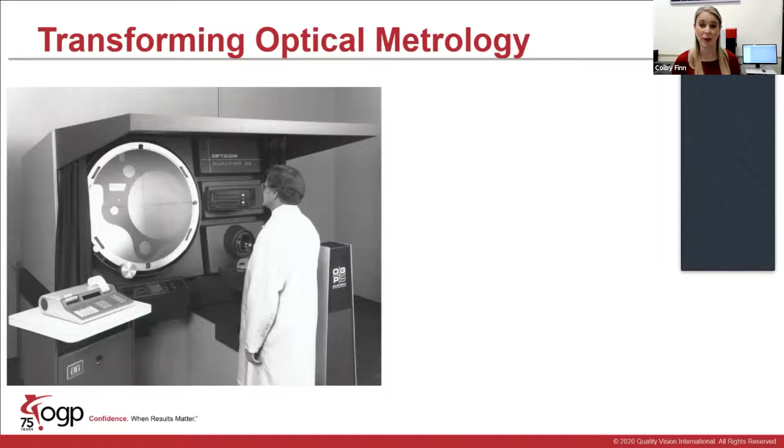So like I mentioned, we have been in the business of optical metrology for a little over 75 years. And we've been part of a major transformation in this industry. When we first started, all measurements were taken with the human eye, like you can see on the screen, with an optical comparator. But ever since we introduced the first grayscale subpixel image processing for a video system in 1980, software became a key component of video measurement.

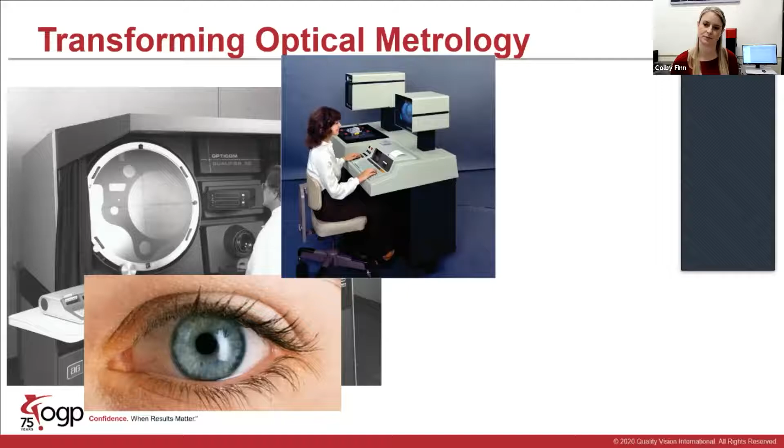And now today, it's hard to find any modern piece of measurement equipment that doesn't require software to take a measurement. So why did this transformation occur? The obvious answer is software is more efficient than humans. You gotta pay people, they get tired, they complain, they make mistakes.

But people are actually really good at some things related to optical measurement, such as automatically recognizing parts, detecting dirt, whether it's from your part or not from your part. And it's taken many, many years to get image processing software to the level where it can mimic human ability in video measurement, but also not require a lot of training. So today we're going to talk about how software technology continues to push optical metrology forward, both related to capability and ease of use.

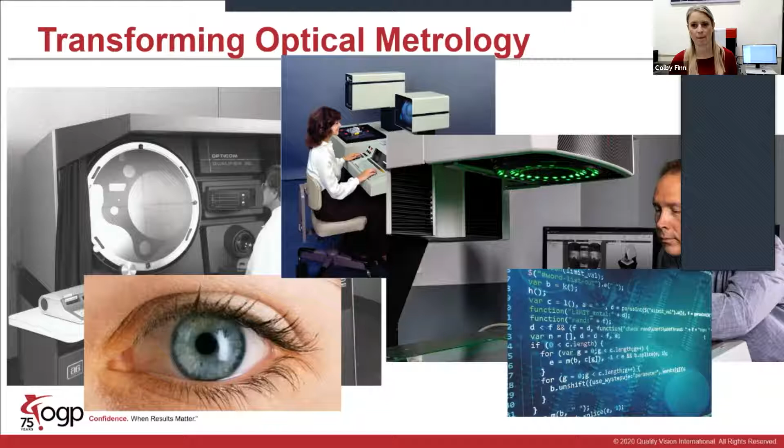So we organized our software tips based on the reasons people choose non-contact measurement technologies, say over traditional technologies like tactile CMM. And there's 3 reasons. The first is they're faster. You can get many measurement points and many dimensions in one shot with optical technologies.

Second, they're better, meaning for some applications, you get more accuracy and higher resolution. This is specifically true for small parts with small features or delicate parts that you don't really want to touch.

And lastly, they're easy to use. So when you're programming a measurement system, teaching it what you want to measure, when it's an optical system, you see a live image of your part. So it makes it very easy to interact and get immediate feedback on what you're measuring.

So today we're going to talk about software tips for video measurement and 3D scanning separately. So both technologies have the same goal to measure dimensions on your part, but there's different strategies and best practices for each. Video measurement, you're usually measuring feature by feature or getting coordinates, where with 3D scanning, you're measuring and grabbing data on your entire part at once.

So Jim is going to show you software tips for video measurement using OGP's Zone 3 metrology software package. Zone 3 is the software that acquires and analyzes data from OGP's 3D multi-sensor systems. And I'm going to show you 3D scanning tips using Kotem's Evolve suite. So Kotem is a sister company of OGP. We're both divisions of QVI.

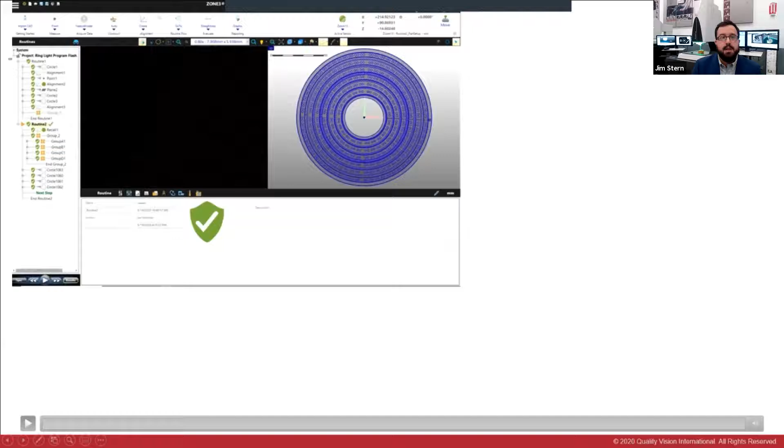So now we're going to show a little video example between what you might have and what you can do with a larger field of view system. So what you're going to see here in the video is a traditional zoom system with a smaller field of view. So we're going to be measuring a multitude of diameters on this part, all right?

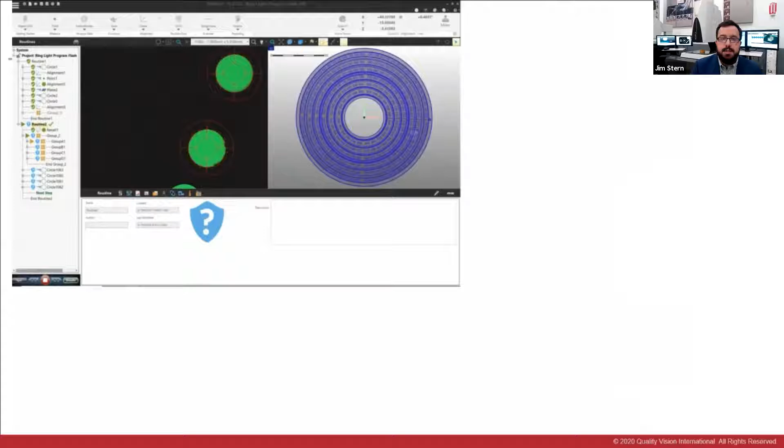So this traditional system has a smaller field of view to start, but also has an optical zoom system to be able to increase accuracy and your optical magnification on the features that you want to measure. So maybe this is not the system or the field of view that you might want to use when you're doing repetitive dimensional checks like these diameters going around this part, because it takes over 5 minutes.

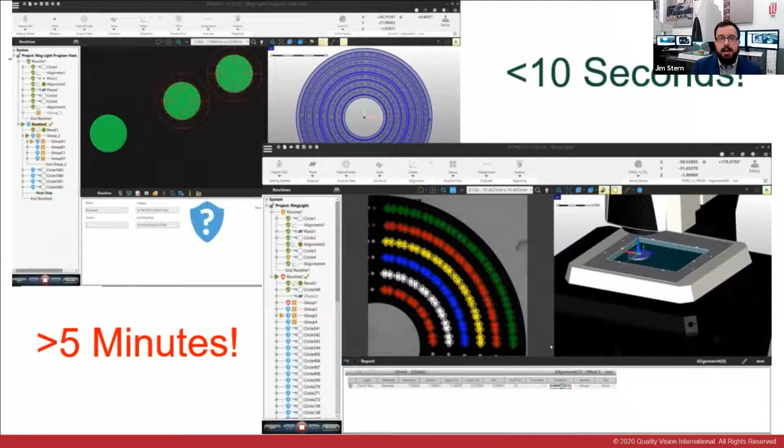Now, let's do the same part on the Fusion system here, where you're going to see a large field of view and be able to see all the measurements at once. Now, while using software, we're able to measure all these diameters in a single field of view all at once, now reducing our inspection time to 10 seconds, all right? Another benefit of large field of view is that it allows you to recognize and align parts automatically. This is possible in Zone 3 at any field of view and on other systems like the traditional one we showed.

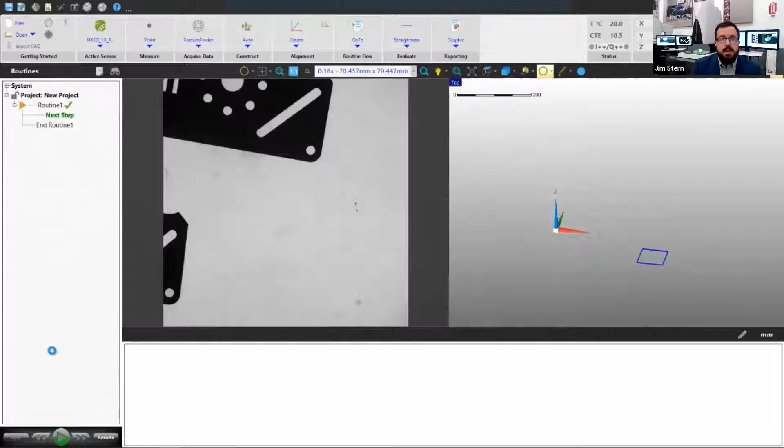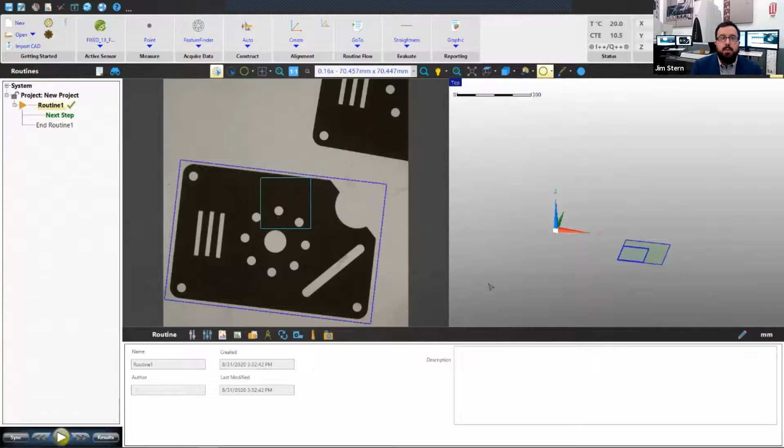But it is more efficient when you have a large field of view to see the entire part that fits inside that. So right here, we have parts set down on the stage, no specific orientation or fixturing, and then we're going to search in a specific area to be able to automatically recognize the part and then inspect all the dimensions that we need to in seconds, showing you a visual representation of what part passed and what part failed, so an operator can easily grab off the stage which ones they might need to reject or which ones they're going to keep.

All right. Now, with having large field of view systems, one thing you got to be aware of is some of the caveats that can go with that. If you're going to take advantage of these entire field of view systems that they have to offer, you need a very high quality lens design combined with advanced software compensations to get the accurate measurements that you're looking for.

We're not going to go deep into the optical lens design theory, but there are two things that are extremely important for video measurement, especially with large field of view systems. Getting the same results anywhere in the field of view, which equates to your distortion across that field of view, and getting the same results even when you aren't at the perfect focus of the system, which represents your telecentricity.

Now, this is a gross example, but the tricky thing is an image can look perfectly fine to the human eye, but have huge errors across the field of view and the depth of focus or the range the image looks in focus. We aren't talking microns, but hundreds of microns. Published accuracy specifications don't typically apply across the whole zoom range. So you can't just assume your field of view is good by what you see on a technical data sheet.

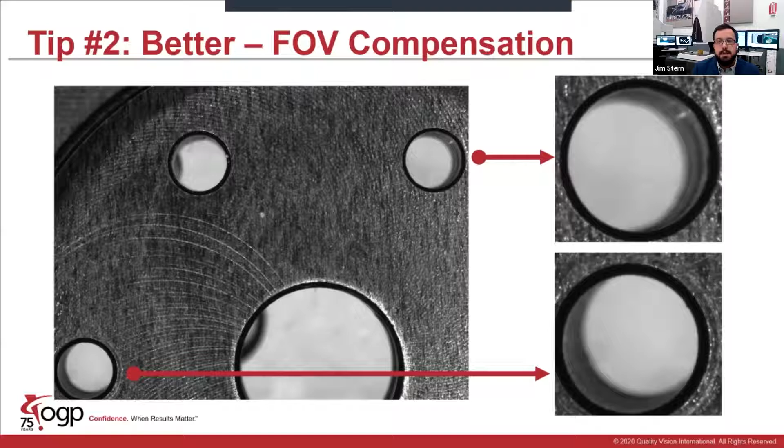At OGP, we've learned you need to have lenses designed specifically for your video measurement and software that understands the characteristics of your exact lens to get an accurate optical performance. Our large field of view systems go through rigorous alignments, compensations, and testing in the factory to ensure they will meet your customer and your specific subpixel accuracy expectations. And what you get is the images that you see on screen now, all right?

Our recommendation is to go with an experienced video measurement system vendor you can trust or get educated on tests you need to perform to confirm your video system is optically accurate. I would also recommend a real-world test of your application on the system you're probably thinking of choosing to measure your parts or your applications in the real-world environment.

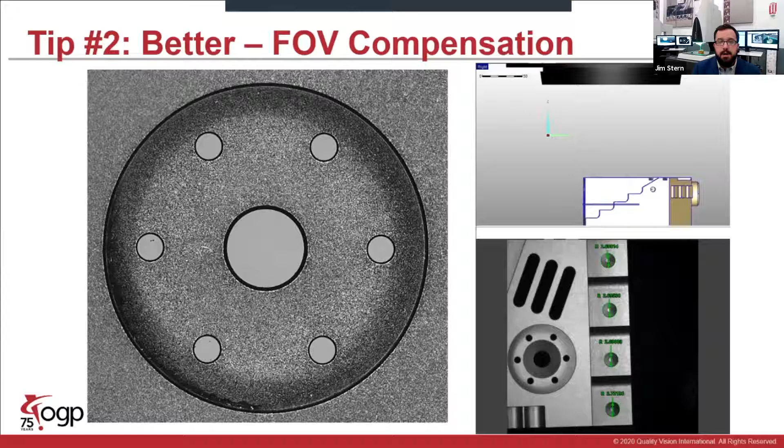Now, with this, you also get to use your full field of view when you're compensating for the distortion correctly with the software or any errors that might be involved. Because you have a large field of view, you want to be able to use the whole optics or what you see on screen. So as you move around the stage, you want the same results inside the accuracy specification for that field of view.

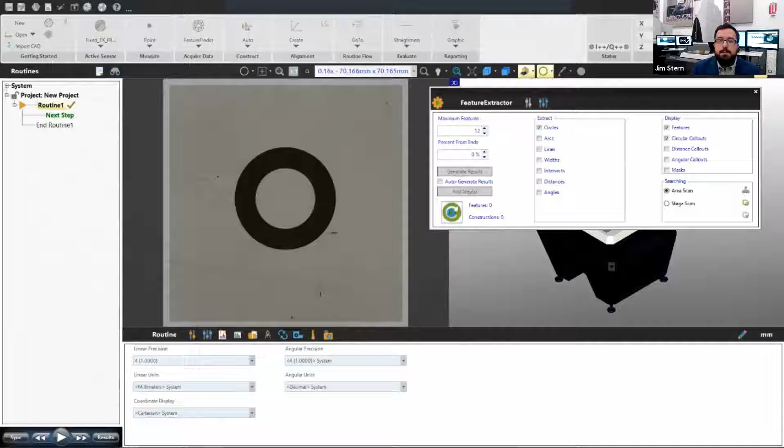So now let's get into maybe some easy video measurements, all right? So one thing you can utilize to make video measurements easier is CAD models, all right? Everybody has CAD models these days, but CAD models really simplify measuring with video. There is a misconception that programming from 3D CAD with video is difficult.

Since your CAD model is 3D, hold on, let me turn the light back on. Gotta save energy. Since your CAD model is 3D and you're only seeing a 2D video image on screen. But this is definitely not the case, and I will show you a couple examples of this.

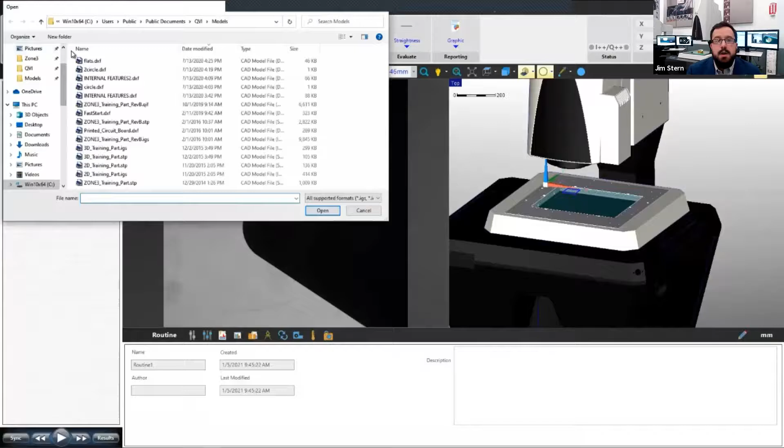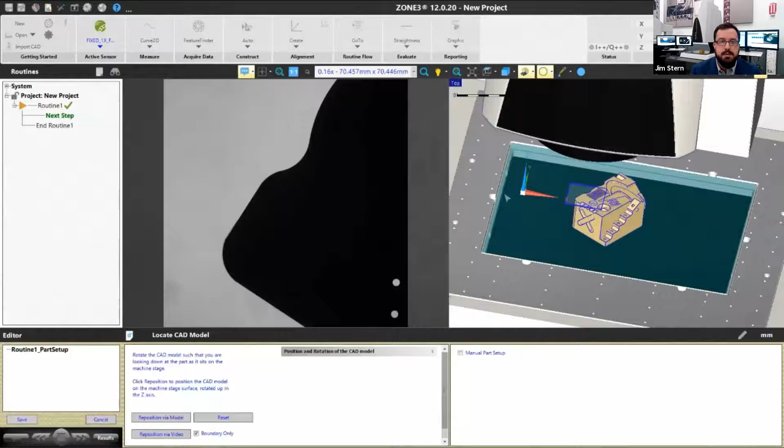All right. So what you're seeing here is a 3D CAD model loaded into our Zone 3 software. It comes in CAD coordinates, but it's not really where it is sitting on the stage. So what we can use is the large field of view to automatically figure out where the part is on the stage using our reposition via video option in Zone 3. Now, once it figures it out, it places it on the stage in the real world where it is, all right?

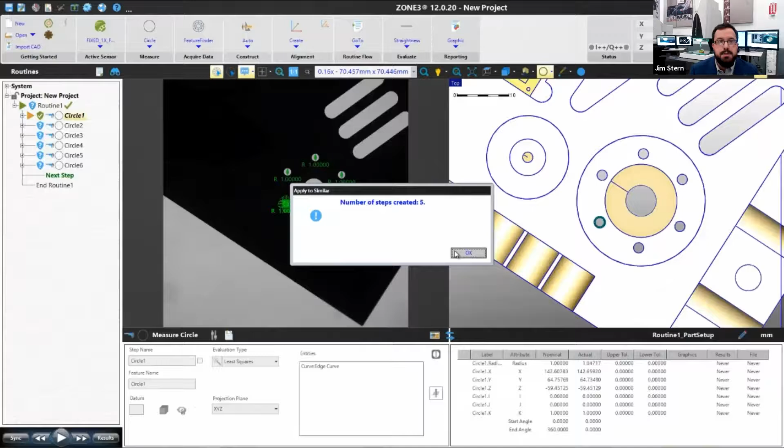So now I can quickly start measuring features on that CAD model using automatic path generation using our edge detection feature finder. Once that's done, I can then use the CAD model to automatically search for similar features and automatically program the extra 5 circles that you see.

We can optimize that to then utilize the field of view to automatically measure that in one single spot on the field of view, trusting that we get the same results because we're compensating for any kind of errors across that whole field of view.

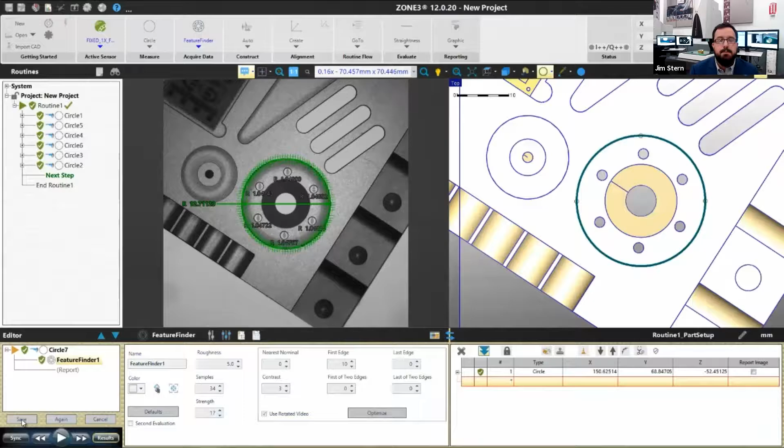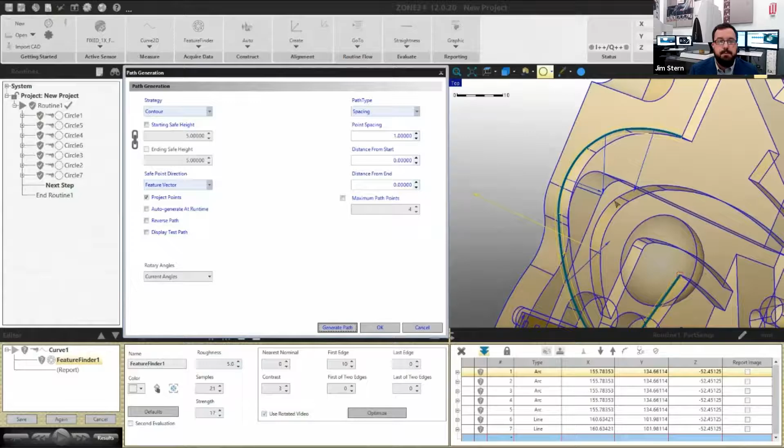Another misconception is being able to measure features that might not be able to be measured using backlight, as well as complex curves or geometries that you'll see here. I'll select multiple curves into one finder, and then use the system to automatically generate a path to measure these features with our feature finder tool all at once. And then we'll go automatically to where it is and measure this automatically with our feature finder tool, breaking up into lines and arcs based on that complex curve.

All right. Those were some tips on how to get faster, better and easier measurements with video sensors demonstrated by the OGP Zone 3 software. But now I'm going to send it back over to Colby to give some tips for 3D scanning using Evolve Smart Profile. All right, there you go, Colby.

Thank you. Great. Thanks, Jim. So like Jim said, I'm going to show faster, better, and easier tips for 3D scanning. Before I get started, I'm going to show you the machine I'm going to use for my demos. So let me stop the share for a second. Get started.

So this is an OGP ShapeGrabber AI 320. ShapeGrabber systems are automated laser scanners for fast 3D measurement. The system can take more than 1 million points a second. So the laser line scan head moves up and down behind this cover here, and your part automatically rotates on the rotary here for full 360 degree coverage.

So this system here can have up to a 190 by 300 millimeter cylindrical measuring range. And this is our most compact automated unit, but we do have larger systems that can scan parts longer than a meter. So this system also has a tilt axis that actually tilts the scan head. It's motorized, it's automatic. And that way you can scan the top of your part without having to pick it up, flip it over, rescan it, and use software to stitch it together.

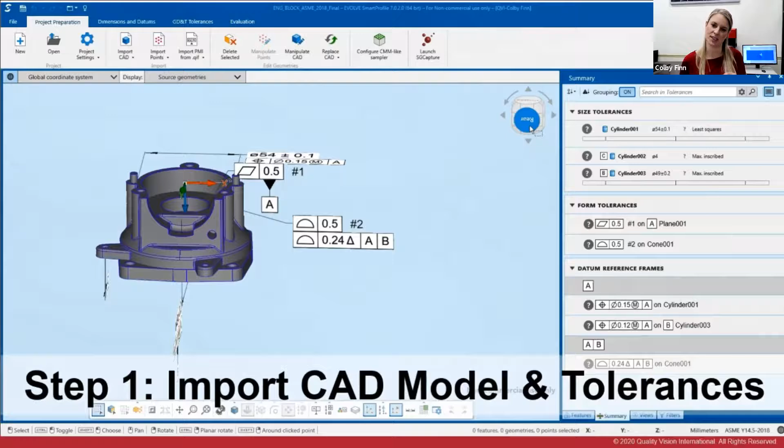So I'm going to show you a new software technology that allows you to overcome these issues and do fast GD&T with 3D scanner data. So we're going to use Evolve Smart Profile and a CAD model to do very quick GD&T. Sorry. So the first step here is to import your CAD model and tolerances. And if your design engineer didn't embed the tolerances in the model, you can readily add them in Smart Profile.

Once you have everything in there, you're going to import your measured points. I'm going to use points from my ShapeGrabber system here, but Smart Profile can take points from any device, whether it's a CMM, laser scanner, CT scanner. So you'll see my points in a second. It's the green scan cloud.

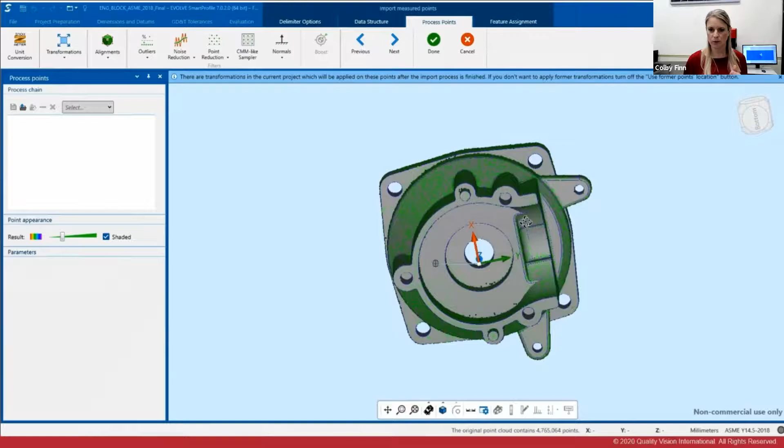And I took 4 or 5 million points with my scan, and the part scanned pretty well. You don't see a lot of gross outliers, but it's still not ready for GD&T. There's still a little bit of noise running on the data. So we have to prepare our point cloud for GD&T. And what Smart Profile has is an algorithm that was designed to take 3D scanner data and make it ready for GD&T. It's called the CMM-like sampler. I'm going to run that now.

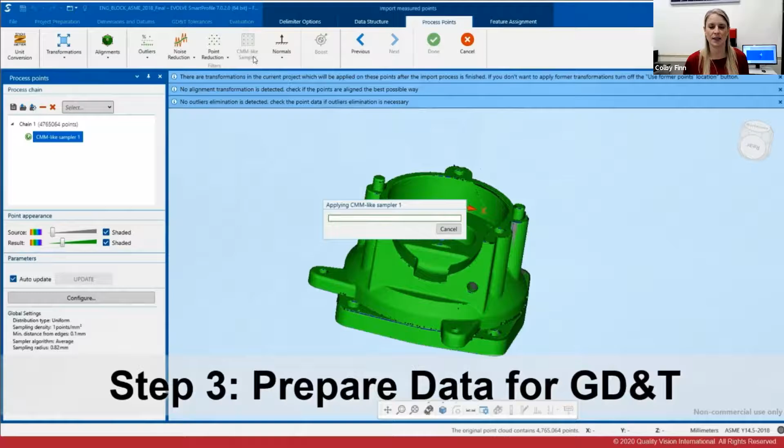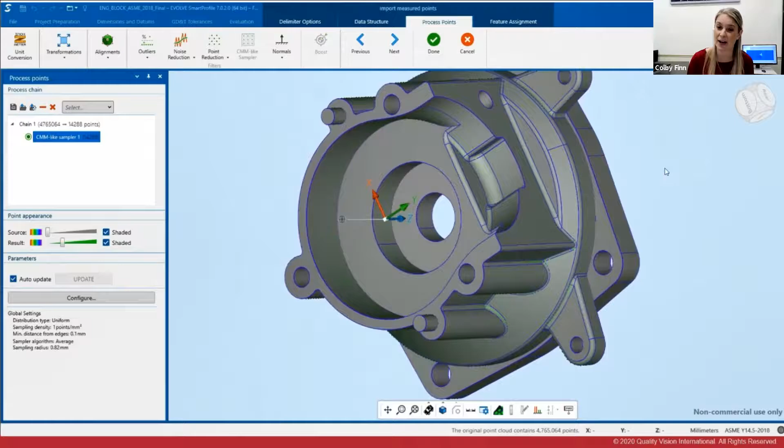So we call it the CMM-like sampler because the resultant point cloud we're going to get is going to look like a high density point cloud taken with a CMM. And similar to CMM data, all the points are going to be valid in X, Y, and Z, and therefore you're ready to do GD&T. So I don't know if you can see it through the video, the tiny little green points on the model are my points after the CMM-like sampler. So now we're ready for our fourth and final step, and that's to evaluate the GD&T results.

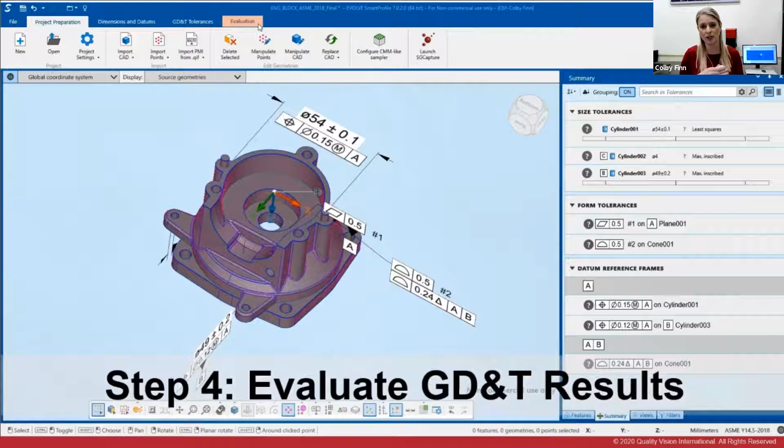So the software is going to fit the point cloud to the CAD model, run a bunch of optimizations to simulate hard gauging and give you GD&T results. So you will see here that everything passes.

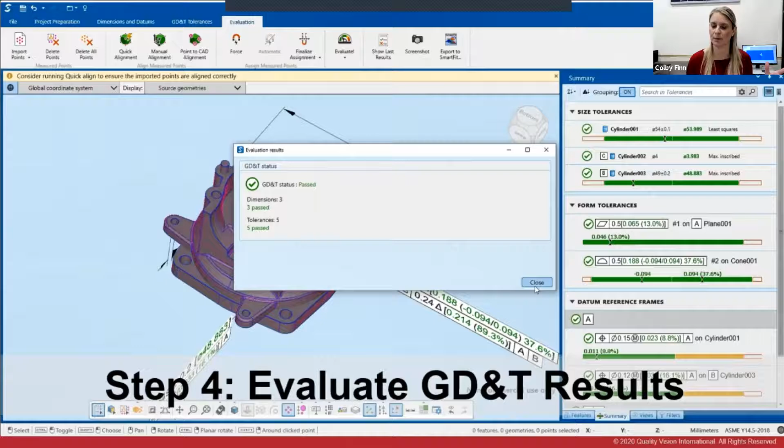And what I was showing you was a step-by-step of how to process 3D GD&T with Smart Profile. But all of the steps from data acquisition to reporting can be fully automated. So you don't need someone here clicking the buttons. You can get a fully automated workflow. So this demo was how to get fast GD&T with a 3D scanner.

And now we're going to move on to how to get better data from a 3D scanner, so more accurate results from 3D scanning. So I'm going to show you a software technique that allows you to get better measurement results without investing more money in hardware. So we're going to show a new software compensation method called Boost.

And what Boost does is lets you take the accuracy of a reference machine and map it onto the data from either a cheaper or less expensive or a faster technology that's not quite as accurate as the reference device. So I'm going to show you an example of Boost for 3D scanning.

And Boost is part and machine specific, which means you have to create this compensation for every part and machine combination you want to give this accuracy boost to. But luckily, the software does most of the work for you, and I will show you the 5 easy steps to both create the compensation and measure your parts in production.

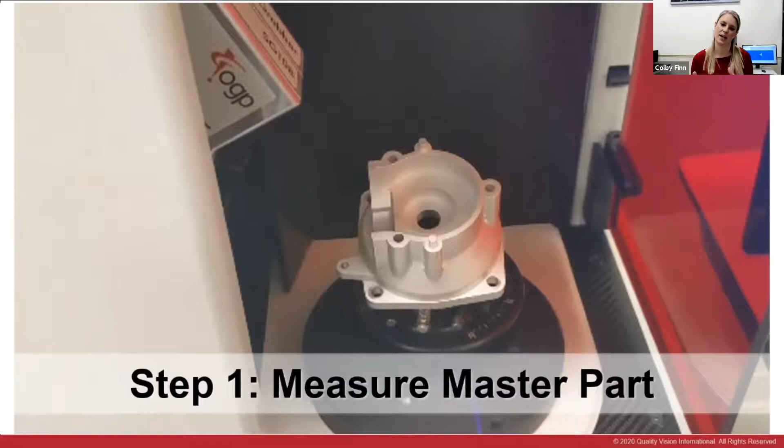So the first thing we're going to do here is select a master part from our production run and measure it on both our high accuracy device, in this case, a CMM, and our fast production technology, in this case, our 3D scanner.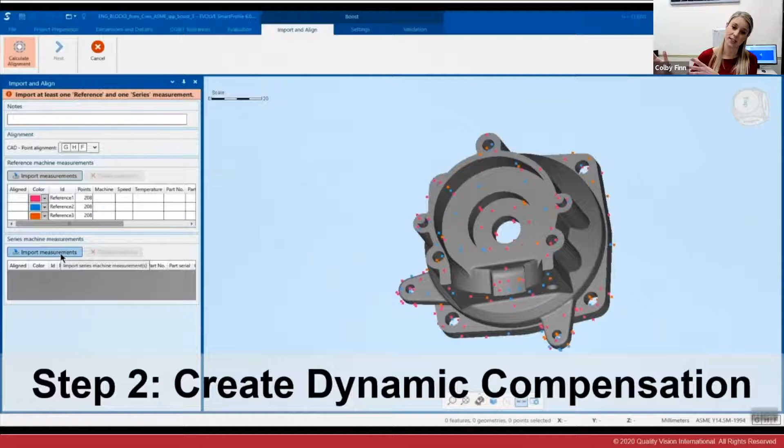Once we have the point clouds from both devices, we're going to load them into Smart Profile, and it's going to automatically create that dynamic compensation. Again, this is going to map the accuracy of the reference device onto the data of your high-speed device.

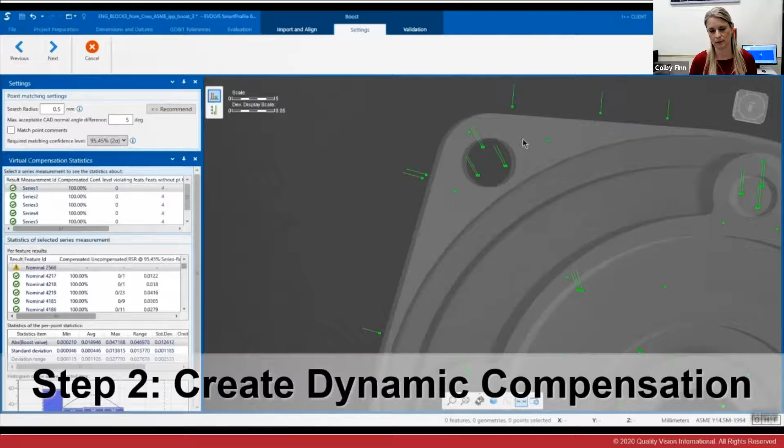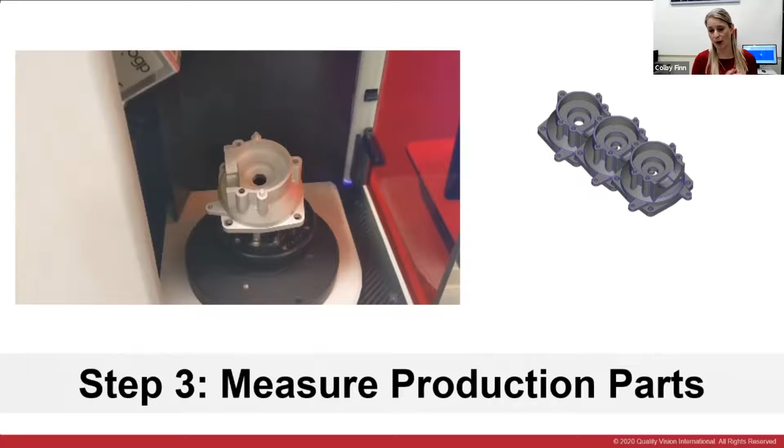So you'll see on the screen, the little whiskers represent the point-based compensation the software is doing. So once you have this map created, you're done with your reference CMM, and you're ready to measure production parts. So step 3 here, we're actually measuring our parts with our very fast technology.

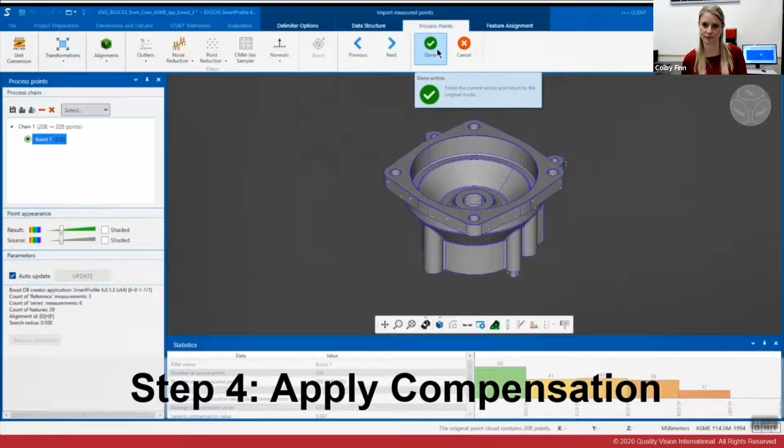And now step 4 is to apply that boost compensation. So in Smart Profile, we're going to click the boost button, and it's going to make those production points more accurate. So now that we've done that, the last and final step is to evaluate the GD&T of the compensated points that are more accurate.

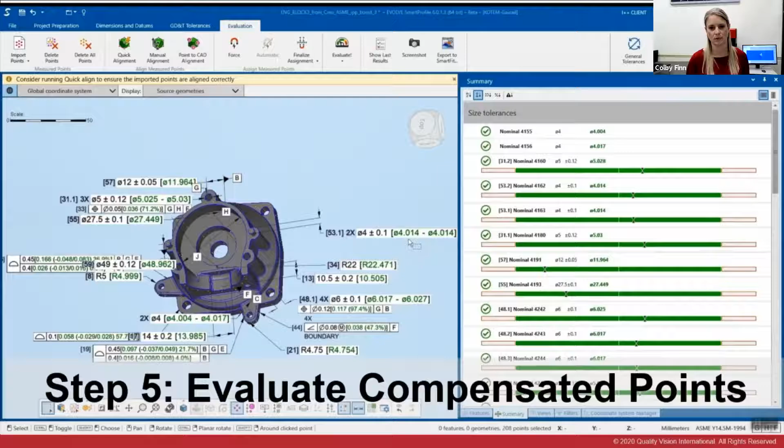And now everything passes. So similar to our last demo, all of these steps can be automated, and I'm going to show you a quick video of what that looks like and what our typical production workflow is like. So here is your typical automated workflow. The operator pushes scan and the machine starts acquiring data.

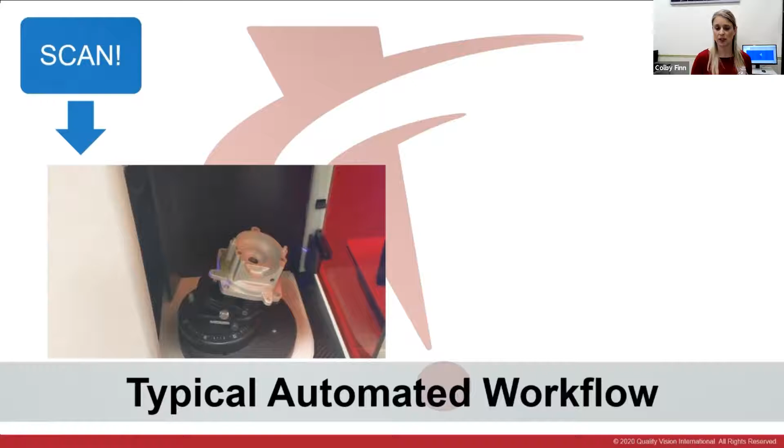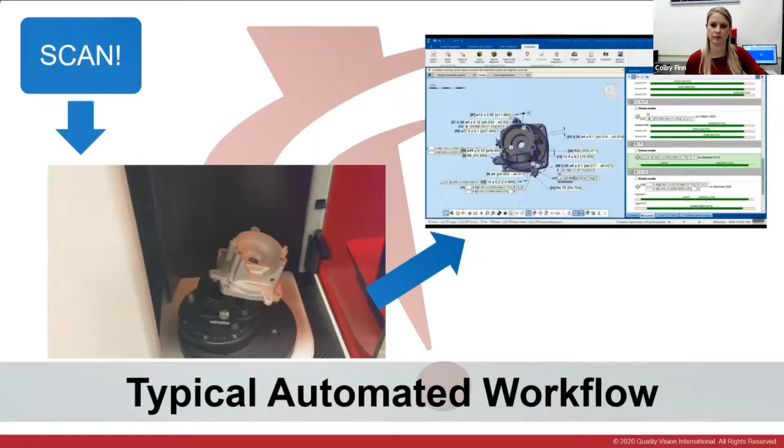As soon as it's done, the points are going to automatically go into Smart Profile, and Smart Profile is going to automatically start evaluating them and produce a report. So this was a way to get better data using software for 3D scanning. Again, so you can use software, so you don't have to invest as much money in hardware.

So our final tip for 3D scanning is about making measurement easier. We're going to show you how to do easy 3D GD&T failure correction. So GD&T can save a company a lot of money.

But that's only if the entire manufacturing operation is applying it correctly, meaning the design engineers entered the correct tolerances, the quality engineers evaluated them appropriately, and the manufacturing engineers know how to adjust their processes to get parts to pass. And we're going to focus on that last aspect, the connection between quality and manufacturing.

So say your GD&T fails. What do you do to get future parts to pass? Machinists are used to working in their machining coordinate systems with their fixtures and their control points. They don't want to adjust their process based on our profile tolerances and our GD&T datum structures.

So I'm going to show you an easy software tool that takes GD&T results and translates them into machining corrections to get future parts to pass. So this is a new simulation and optimization tool that's part of Evolve in the product Evolve Manufacturing.

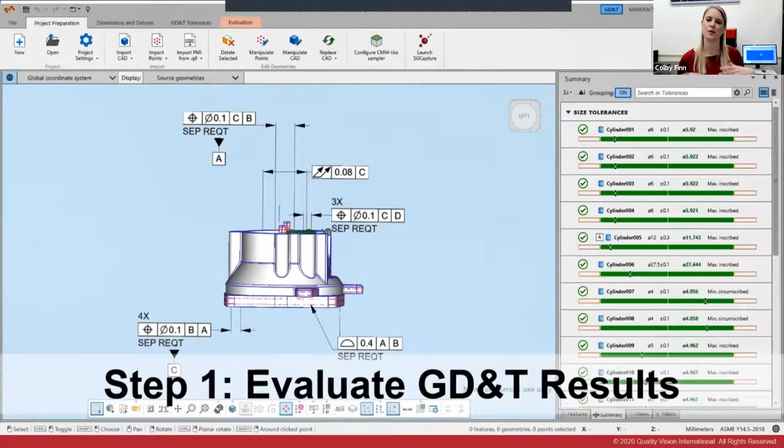So we're actually going to start out where we left off with the other two demos, where step 1 is to evaluate our measurement points for GD&T.

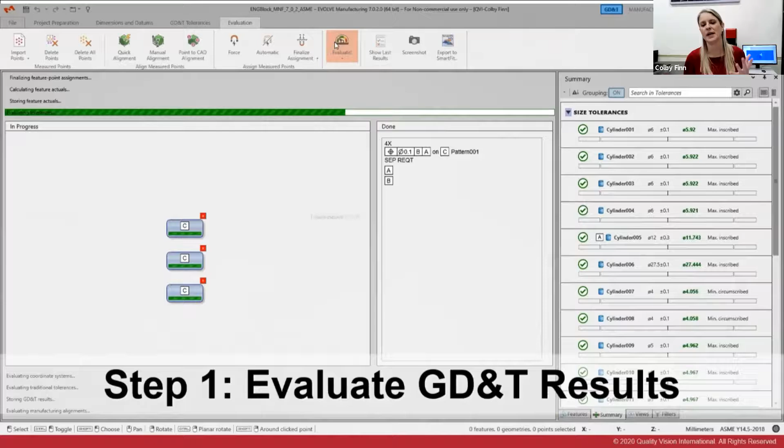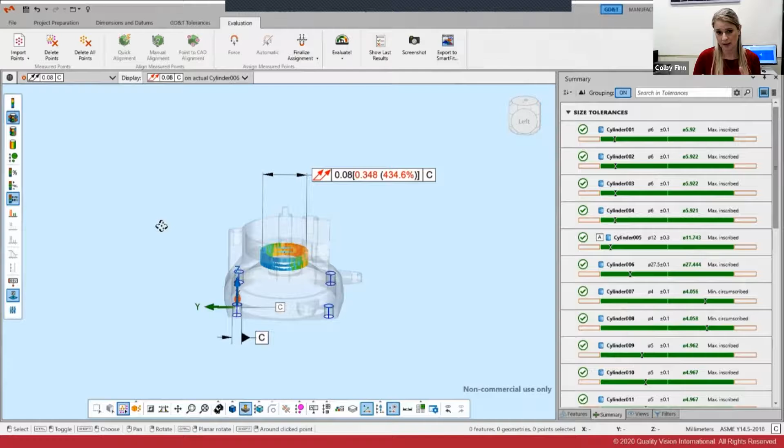But this time I'm going to have a bunch of failures. You're going to see a lot of the red on the screen. Red is bad, means things are failing. We're going to focus on this total runout tolerance of a cylinder relative to datum C right here. So if I click on that, I will see the points and see how it's constrained to the datum.

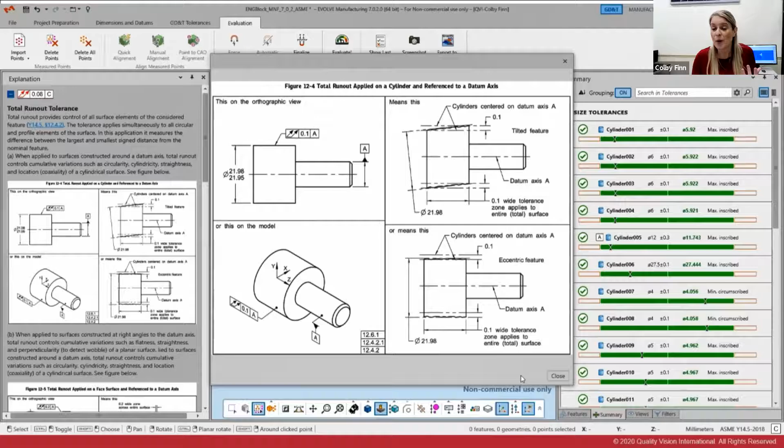And say I wasn't quite sure exactly what this call out meant, I could click on our explanatory system, and it's going to bring up the exact part of the GD&T standard where that call out came from. You can see the diagrams and everything. But even if I'm educated on total runout, I still don't know how to fix this failure. Was my cylinder manufactured wrong, or was my datum machined in the wrong position? So that's the problem our software is going to solve for us.

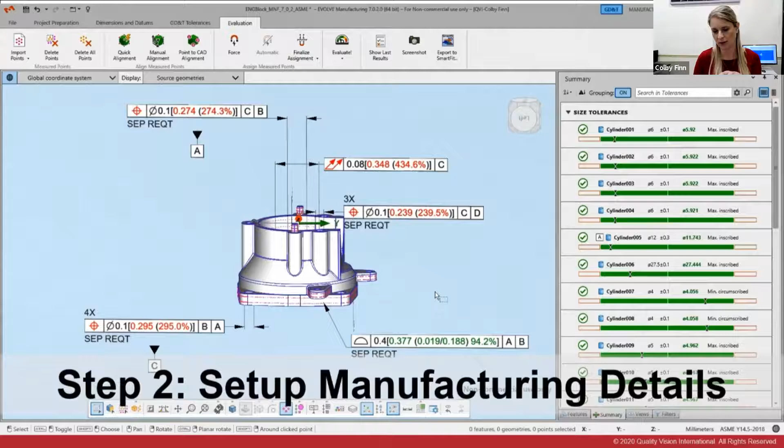In order to do that, the software needs to know the manufacturing details. So we're either going to import from CAM or enter the manufacturing coordinate systems and tell the software how the features are grouped together by machining operation, meaning which features were machined together. With this information, the software can run what-if simulations. What if I shift operation 1 over a little bit? Would that make my GD&T results pass?

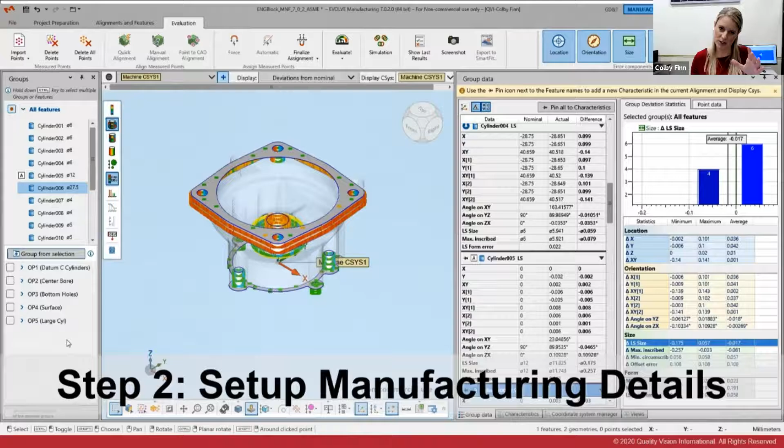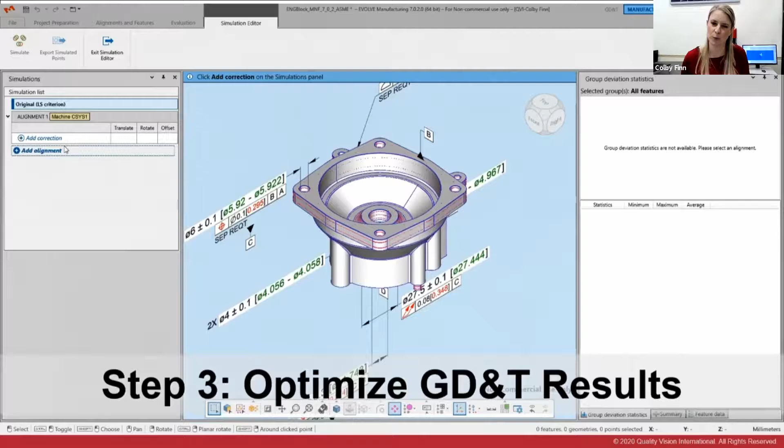So now that we know which features are machined together, we're going to go into our simulation wizard here. And in this wizard, I'm going to tell the software what manufacturing operations I want to allow to be adjusted. And I'm going to select operation 1, which made that datum C that could be problematic. Then I'm going to check optimize and have the software run the simulation.

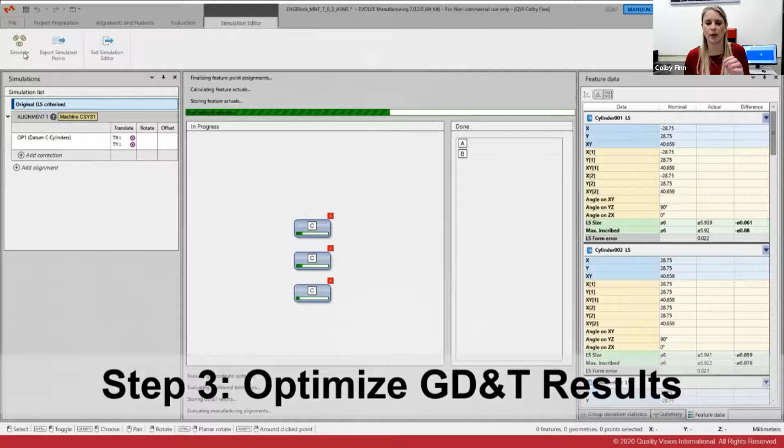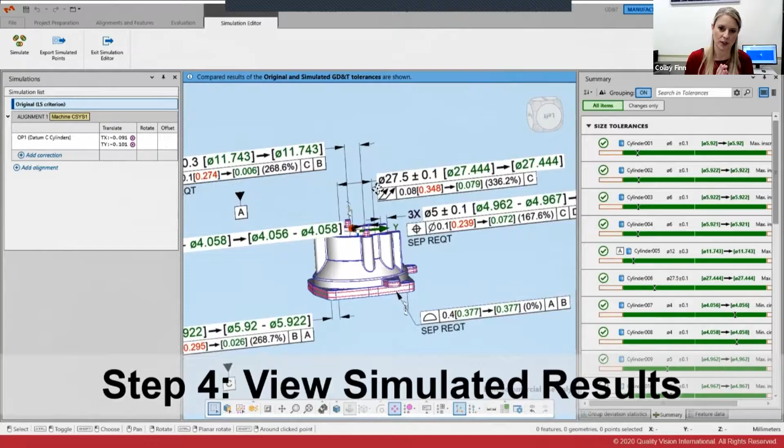So what it's going to do is calculate the best adjustment to that manufacturing operation, to get the GD&T to pass. So when this is done, you'll see a recommended adjustment, and then you'll see the simulated results of what the GD&T would look like if manufacturing made that adjustment. So first, we'll look at the recommended adjustment. It calculated that we should shift operation 1, that datum C, over in X and Y by about 0.1 millimeters.

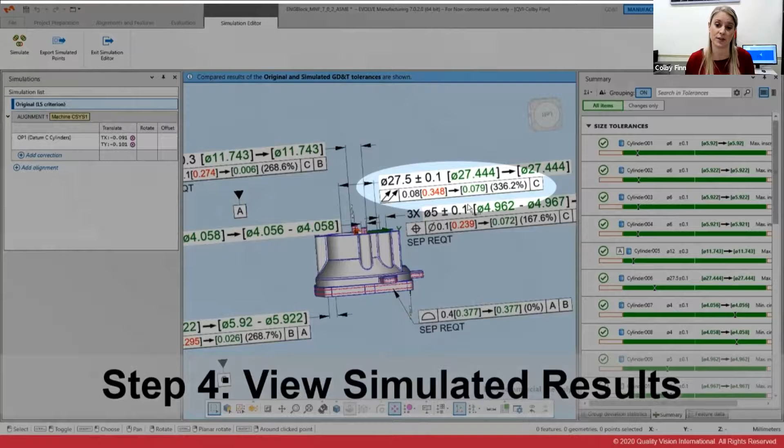And the simulation results are shown in the model window with the little arrow showing before and after. If we were to apply that manufacturing adjustment, the results after the arrow are simulated results, and that total runout tolerance would pass. And if you look, actually everything's passing now. So that datum C was my whole manufacturing problem. So with this information, the quality engineer is now armed to go talk to manufacturing and know how to fix parts going forward so future parts pass.

So that demo showed how it's easy to communicate between quality and manufacturing with the Evolve suite. The whole goal of Evolve is to help a company implement GD&T across the entire enterprise. So that's our final tip. And the key takeaway from our presentation today was that advanced software makes optical measurement faster, better, and easier. Therefore, you should take the time to learn and implement new software technologies to help you better measure dimensions on your part.